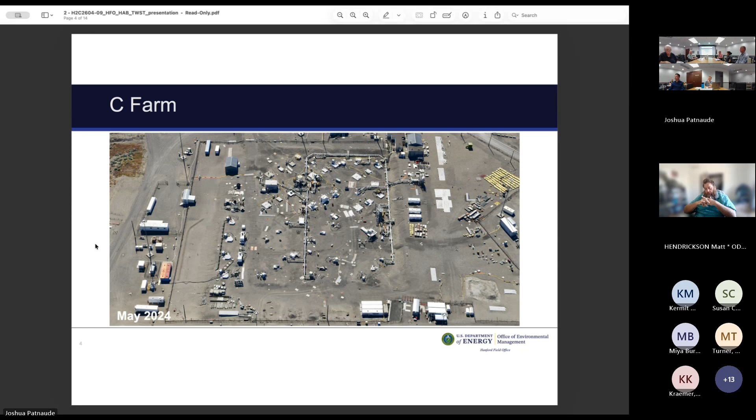All right, next slide. AX farm. So AX farm retrievals. Some fond memories of AX farm. I think that this was the farm that started up when I first joined the tank farms program. AX farm again had 4 tanks in it. It initiated retrievals in mid 2019. It finished retrievals October of 2025. I think that would be field operations, field retrievals, reaching the limits of 2 technologies occurred October of 2025.

I think initially there was about 500,000 gallons of tank waste stored across those 4 tanks in AX farm, but those retrievals resulted in about 1 million gallons of tank waste being added into the double shell tank system. In this farm, I think the radioactivity was much higher than C farm. Somewhere around 2 million curies were retrieved from AX farm and into the double shell tank system. So from a risk perspective, a lot of good success in removing a lot of those radionuclides from AX farm into the double shell tank system.

Effort took 6 years, and I'd say a couple of those years were during the COVID timeframe as well. So work crews did a lot of good work making those adjustments within the tank farms. Accomplished AX 2, 3, and 4 really well. I think AX 101 was the largest tank volume that they had to retrieve out of AX farm, and that finished up just last year. But that was a big lift with AX 101 that they finished.

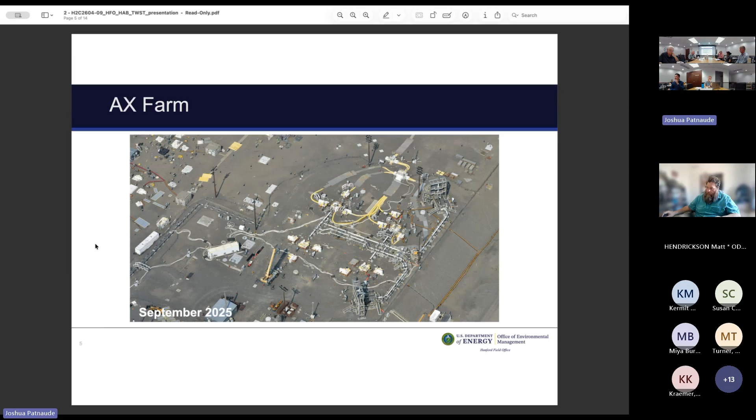I don't know if I had photos of AX1 on the next slide. I did, yes. You kind of see the interior within AX1. On the left are photos before it was retrieved. And you can see a lot of that tank waste in the left-hand side photo. The white material would be a lot of what we call salt cake. So tank waste was pretty dry when the crews went into that tank to retrieve it, right? So that's kind of dry salt where water is added into the tank, salt is dissolved. Dissolved salt water is then pumped out into the double shell tanks.

All the walls, all those risers, Dave and his team had to rinse all of that off, and I would say it doesn't dissolve readily, right? So it takes a long time, a lot of batches, a lot of water to dissolve a lot of that salt cake. Can't remember if there was sludge in that tank, but some of that material, if there was sludge, would have to be mobilized within a tank towards the retrieval pumps, which would then pump it out into the double shell tanks to retrieve as much of it as possible. AX 101 was certainly a very difficult tank.

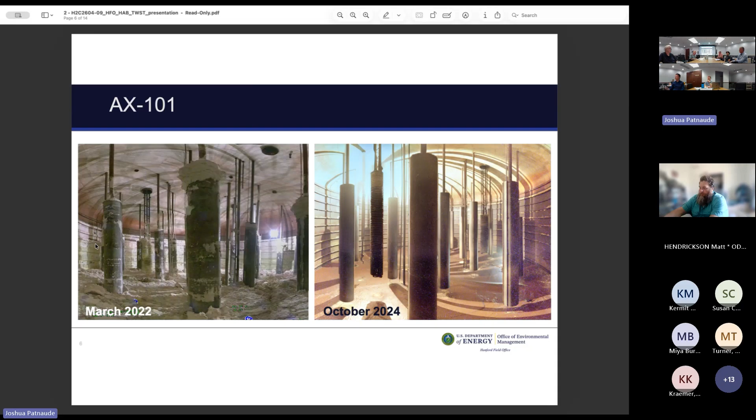So a lot of good progress on AX farm. Well, I like the before and after photo, and I'm sure I have more, right? I don't know if I have another one after this. Yeah. And that's fine. Yeah, that's fine.

Dave and his team have taught me quite well that you need power, you need water, and you need ventilation, right? You need electricity to operate a lot of equipment. So a lot of that infrastructure has to be installed and placed inside each of these single shell tanks before they begin retrievals. They have to have ventilation systems to manage a lot of the air, a lot of the hazards when it comes to retrieving tank waste from single shell tanks. And then the water, which supplies a lot of the water that's needed to retrieve salt cakes, supernate from these single shell tanks.

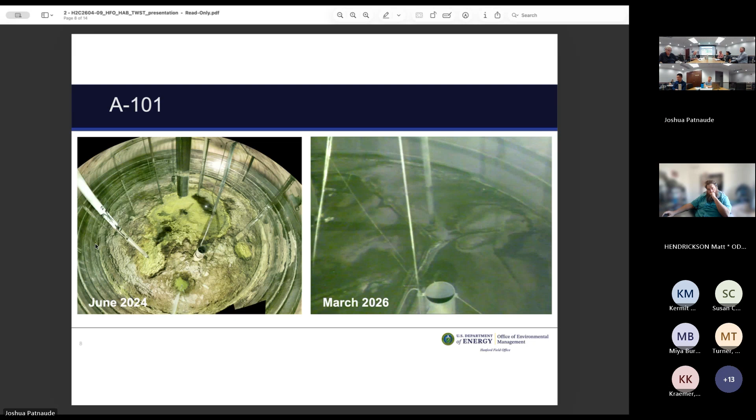But it had about 350,000 gallons inside of A101 when it started. And I think it took about 1 million gallons transferred into the double shell tank system before the limits of two retrieval technologies were reached at A101. But A101 did wrap up this year. No, just last year. Just last year. All right, the next slide.

A102. So A102 retrievals. This is one of the tanks within A farm that had a bit less waste in it than some of the other A farm tanks. I think it had about 50,000 gallons initially, which you can kind of see in the left-hand side photo. And Dave, you'll have to tell me too if the right-hand side photo was a mid-April photo or end of April photo for A102. It would have been in mid-April. We're still doing high pressure water there. Okay, so it was still in progress at the time that the right-hand side photo was taken.

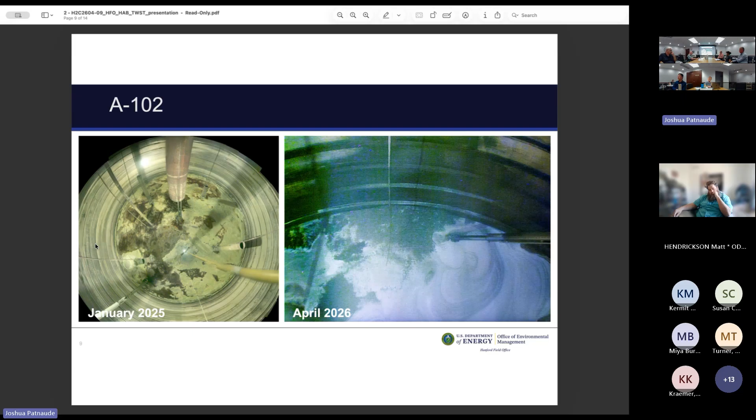I want to say about 200,000 gallons was transferred from A102 into the double shell tank system. And again, this tank reached the limits of two retrieval technologies April 30th. So just last week. And so it'll have to go through all the drying and then eventually the sampling and characterization before it can be officially completed with retrievals.

Next slide, I think I have the third tank within A farm that's undergoing retrievals. A106 had actually started retrieval before this month. It had reached about 77% retrieved, and then we went over to A102 and finished out A102 while we were managing some equipment issues and installations of, I think, a second sluicer inside of A106. And so A102 finished up while the equipment installation was occurring within A106. So A106 is the before photos on the left. Started out with about 80,000 gallons stored within A106.

It has currently gone through 20 batches of retrievals. About 300,000 gallons transferred into the double shell tank system currently. Sits at about 77% complete again. We figured there's about another 2 to 3 months worth of retrieval operations before we would forecast reaching the limits of two retrieval technologies within A106.

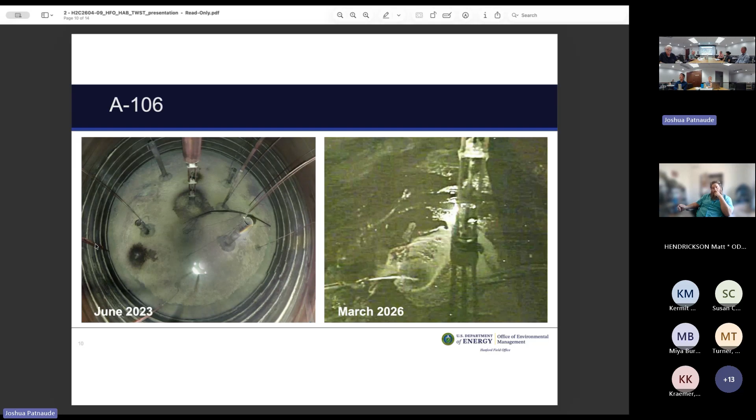After A106 is A103. So A103 currently has some equipment being installed. I don't know if I have a photo of A103 in the slide deck. Yeah, I do. It's wonderful. So A103 will be the fourth tank that would be going through retrievals in A farm. Equipment again is being installed for A103 retrievals.

It should start up after A106 is completed, and A103 is a big tank. There's a lot of material within A103. It's probably about 750,000, no, that's too much, 370,000 gallons of tank waste in it. But based on the material that's in there, a lot of salt cake, a lot of solids, I think it could result in well over 1 million gallons of material being transferred into our double shell tank system with this one tank alone.

And it could take maybe a year compared to some of the other tanks which have taken less. So A103 will be a big lift to retrieve. But again the current plan would be to start this up in the November timeframe.

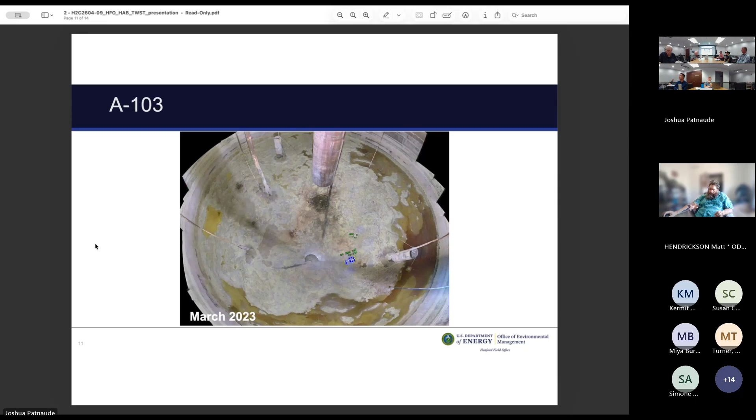All right, and I think that takes us to the end. So A104 and A105 would be the two remaining tanks that would have to be retrieved out of A farm. They have some tank waste in them. I think they total about 100,000 gallons of tank waste between the two of them. They also have a lot more equipment and structural challenges.

We're working with subject matter experts and an expert panel to identify some additional potential technologies for the retrievals of A104 and A105, given some of the challenges that exist with the structure of those tanks. That expert panel has been meeting since October of last year. And we expect their final report sometime this year about any additional potential technologies that could be deployed for tanks like A104 and A105.

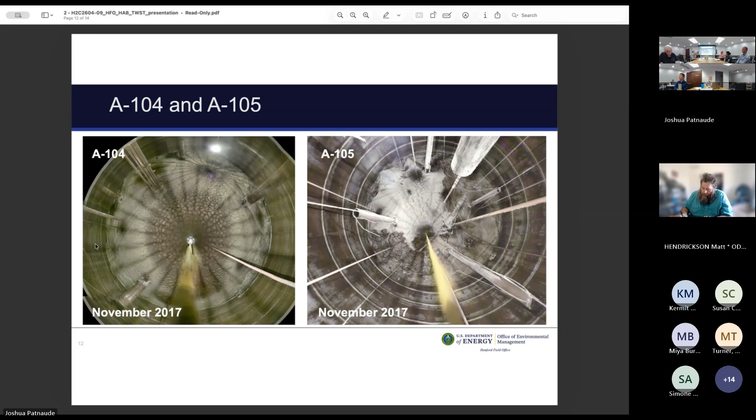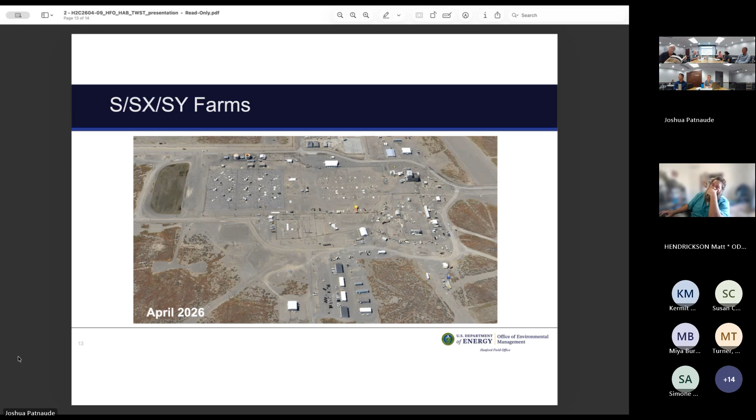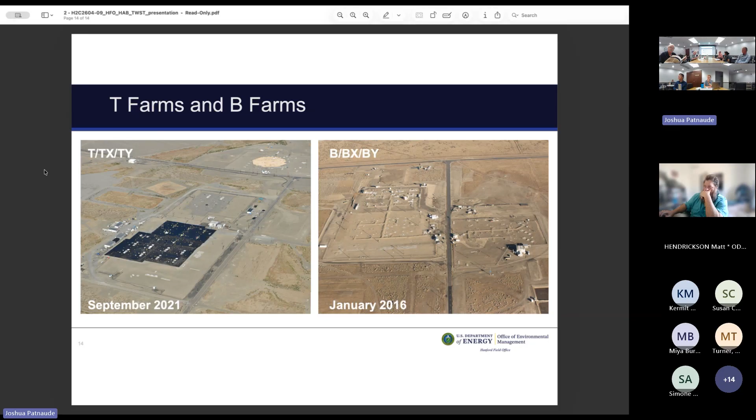I don't think there are any slides after this. All right, so happy to take any questions. There's probably a lot of detail I didn't cover, a lot of detail that Katie and Dave can provide. So if there are questions about single shell tank retrievals, happy to take them.

Okay. Before we move to questions, do you want to check in with Ecology? Is there anyone that would like to provide perspective? Amy, would you like to give perspective? I'm thinking. Okay. I'm thinking.

I know DOE and H2C have been doing an excellent job with the retrievals. This last one, they got out as much as they could, and it looked really good. We went out and watched the last of the retrieval process, and it looked really clean. So we're pleased with that. So yeah.

Knowing that we've had Phil join us since we started, is there anyone online from EPA that would like to provide perspective? With that, I think we're ready to move to questions. This is open to everybody. If you're online, which is most likely the case, be sure to raise your hand in Teams. And if you're in the room, you can flag me down like Bob Quirk. He'll lead us off.

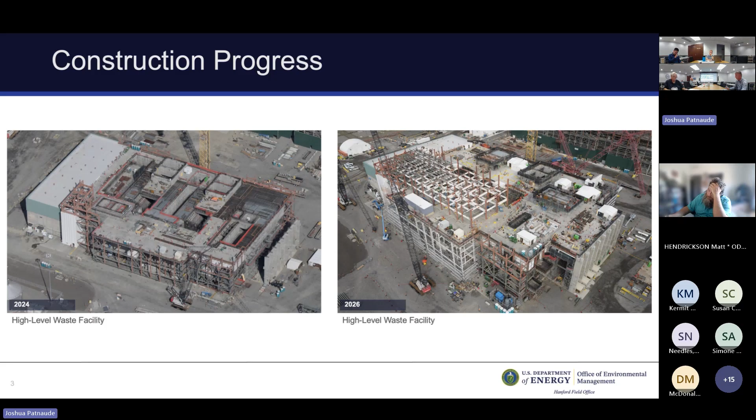The current approach for the HLW facility is to be designed to treat the whole of the Hanford high-level waste tank mission. The initial operation of that facility, in accordance with the holistic negotiation work, as well as the alternative analysis, is alternative analysis 18, which will be fed from the tank farm through the waste transfer vault directly to the high-level waste facility in a direct feed approach. So let's go ahead and shift over to the next slide.

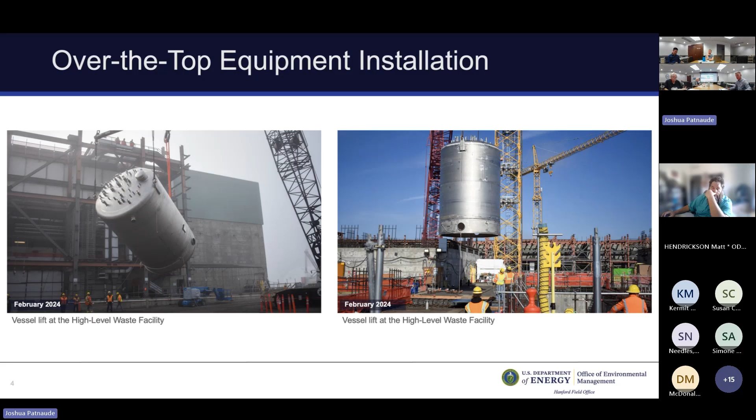So there was work that occurred from 2012 to 2023, but it was at a much lower scale than we had done previously. So really setting these vessels was a great milestone in showing the progress that was made during that time, as well as kicking off this latest effort to finish off the facility design. These particular vessels are effluent vessels, and so they deal with the off-gas condensates and other decon liquids that occur during processing. It's important to know the high-level waste facility is very much a remote-handled facility. And so as we get into the next pictures here, we'll get into that a little bit more. You can go to the next slide.

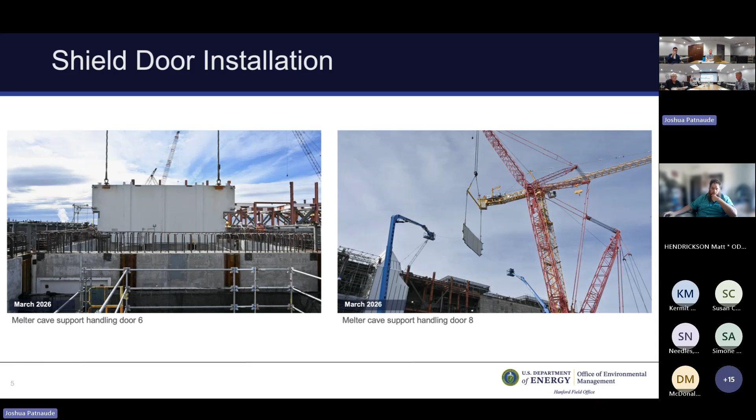But as I indicated, all these shield doors are now set in the facility, which then allows us to complete the concrete placement. This particular door type, there are actually six of these particular door types, and it actually moves vertically up and down to allow bridge cranes to come into that maintenance area. So, all right, let's go to the next.

Also highlights another effort that we have undertaken in this phase of the project, and that is an aging and obsolescence review. Given the duration of the high-level waste project and WTP in general, we have some equipment that we've been in custody of for well over a decade. And so utilizing commercial nuclear applications that are out there to look at aging and obsolescence of mechanical, electrical equipment, we were able to evaluate our equipment and determine portions of it that needed to be replaced.

And then we are able to allow that to feed into the plans for when that work will actually occur, when we actually procure the equipment. The key is understanding on these cranes what work would have to be done in the future, and could all that work be done in the crane maintenance areas within the facility. And we were able to step through that. It was a very positive effort.

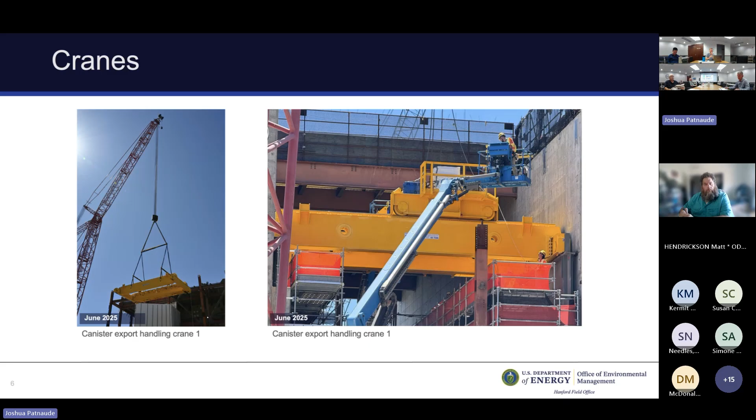It shows both the agility of the current nuclear supply chain as well as some of the challenges in procuring equipment, as we looked into some of the details of that with the different vendors. All right, let's go ahead and go to the next slide.

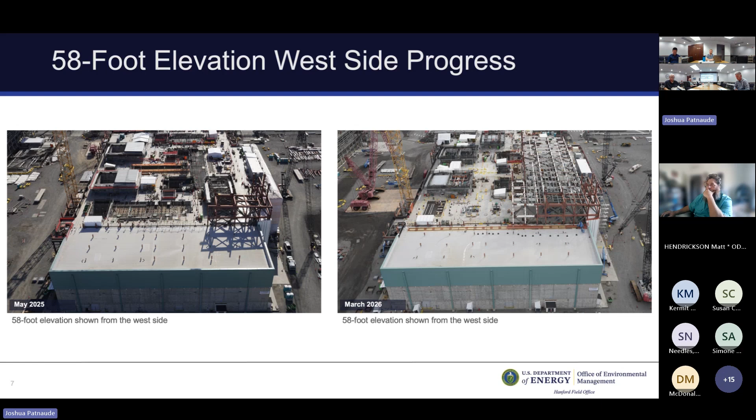So overall, a great opportunity to incorporate those lessons learned into the HLW facility and ensure that we draw on those and make the challenges they face less of an issue as we move forward. As many who have worked in nuclear facilities understand, you got to be slow and methodical, and nothing is necessarily ever easy. But our workforce does a phenomenal job of trying to tackle the challenges both on the operational side as well as the engineering and construction side.

All right, let's go ahead and go to the next slide there. So this just shows the melter cave progress over the top. So if you look at the picture to the left, you see significant openings in the center of the facility there. To the far right is actually where we lowered in the cranes for the melter cave. Each cave has 2 bridge cranes, one crane with a manipulator arm that's able to handle the many jumpers that are associated with the melter cave.

And then you can see in 2026, we've got the majority of the melter cave then sealed up. There are some holdouts that you'll see on the far left next to the structural steel. We've determined it's optimal to place a number of the last remaining vessels. While we could bring them in through the melter export and import paths, it's to our advantage to lift them in via crane. And then you can see on the far right side now we've begun to lay the decking to do concrete placements over the top of those access areas and those maintenance areas, and really then allow the structural steel to complete and then move into siding.

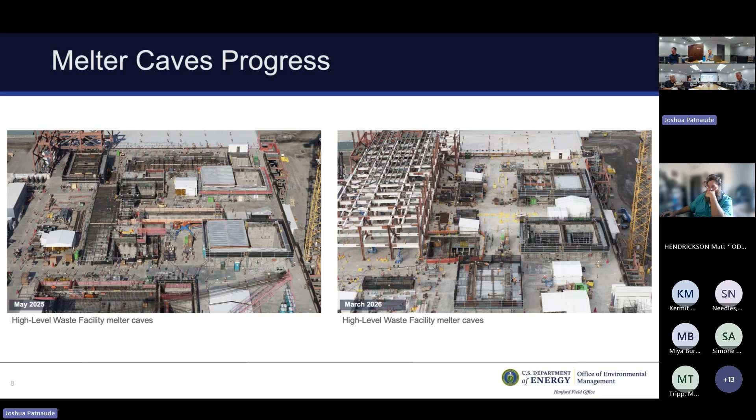The goal is that we'll essentially be complete with major concrete pours. We've already completed the major equipment installations over the top. And so ultimately then it's into finishing up that structural steel and starting to place siding. We'll begin to receive siding as early as this summer, midsummer, and then it'll start to get installed onto the facility. And that is a huge accomplishment. The reality of it at the Hanford mission is we need remote handled facilities, and progressing this facility provides great leverage and continues to progress the high level waste mission. So.

All right. Next slide. All right. So from this side of the house, we get to see a little bit better image on some of the melter cave close up. This gives you just a little bit better angle on it. And then on kind of the far right side of the first picture on the left there, you see the decon and canister handling and storage portion of the facility. And you can see as we go to March of 2026, the majority of the concrete is now installed there, allowing us to continue the progress of structural steel installation.

So this highlights again another great opportunity as we continue to look at lessons learned, and that is taking a look at the flow sheets associated with these facilities and understanding what are some of our limiting factors, rolling in again additional lessons learned from LAW relative to effluents, relative to decontamination activities, and how to best allow the high level waste facility to move things forward. And so the team's done an excellent job in completing that work.

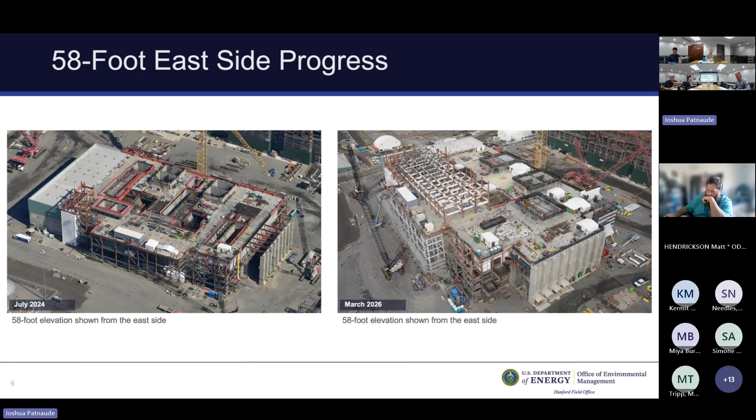As we stand to date, we're about 53% of the way to 90% design for facilities in the high level waste facility. And that also includes some balance of facility capabilities that we have to implement with the direct feed high level waste facility. The most significant being the emergency power facility that will provide emergency backup power in the case of a seismic event. So with that, I think that was the last slide, and we can answer any questions that you might have on the status of the high level waste facility.